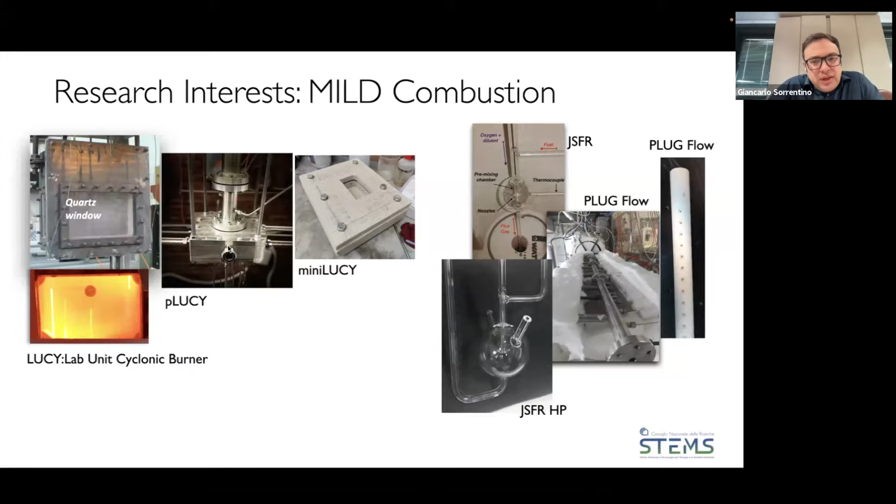So when related to the talk of today, part of our group's research interest is related to mild combustion, and from an experimental point of view we have different facilities, in particular related to the study of kinetics of this combustion regime and the interaction with turbulence and heat transfer in lab scale reactors.

We're working by following this scale bridging approach, which I will also underline later, where we can start from very simple zero-dimensional characteristics of the combustion towards semi-industrial and industrial application of this regime. Of course, we also perform CFD simulation to design apparatus and validate experimental results, along with chemical diagnostics, modeling, and optimization for the kinetic schemes.

Our team, which we call the Pyrolysis and Mild Combustion Lab, is mainly composed of 7 plus me, 8 researchers at different levels. As I said before, we are mainly focused on sustainable combustion processes and pyrolysis processes, mainly for biomass. There are also some PhDs and postdocs who work in our lab and are framed in different research projects that are mainly based on the same topics.

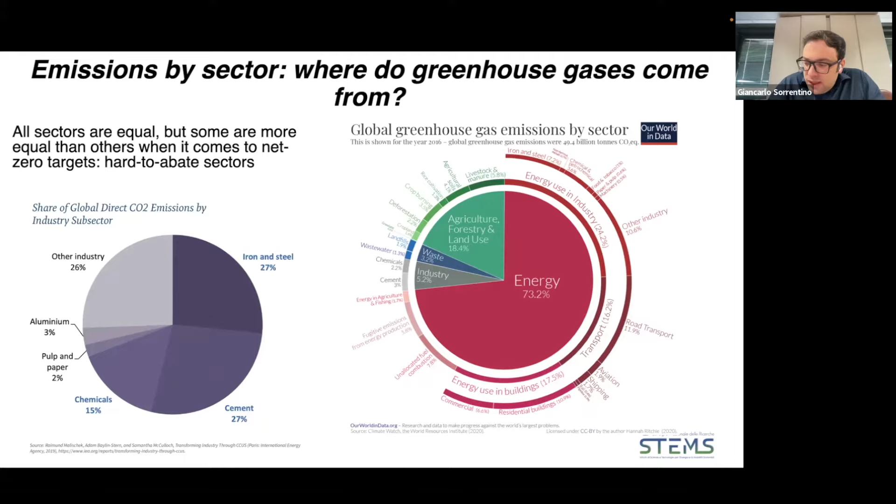As we can see from here, we have different hard-to-abate industries and energy-intensive sectors that are very difficult to decarbonize, and in particular, this is a key point, especially for combustion engineers.

In particular, in this framework, the International Energy Agency identified several scenarios to decrease CO2 emissions, and the main drivers were related to system efficiency, renewables, and fuel switching methodologies that can help reduce greenhouse gas emissions.

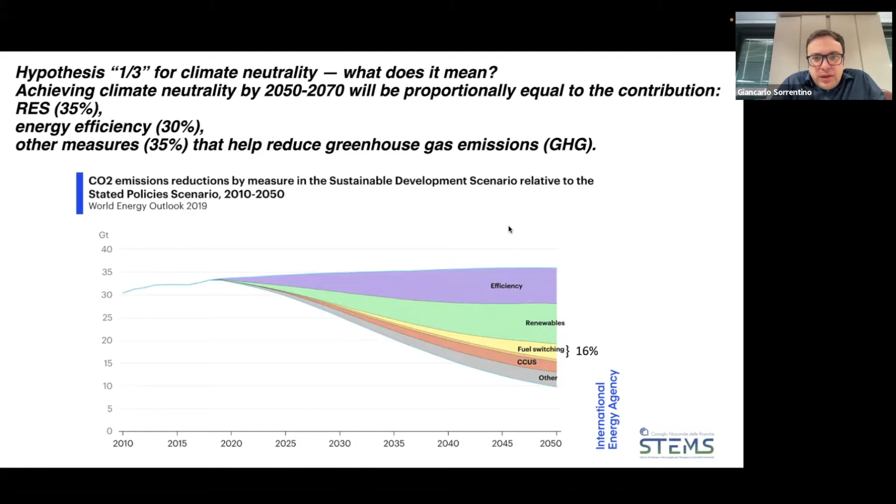So it's very important to frame this scenario related to CO2 emission reduction, and the variability of this future energy mix requires flexible, efficient, and clean combustion technologies. It's very important to address these challenges with combustion technologies that can be framed in this kind of scenario.

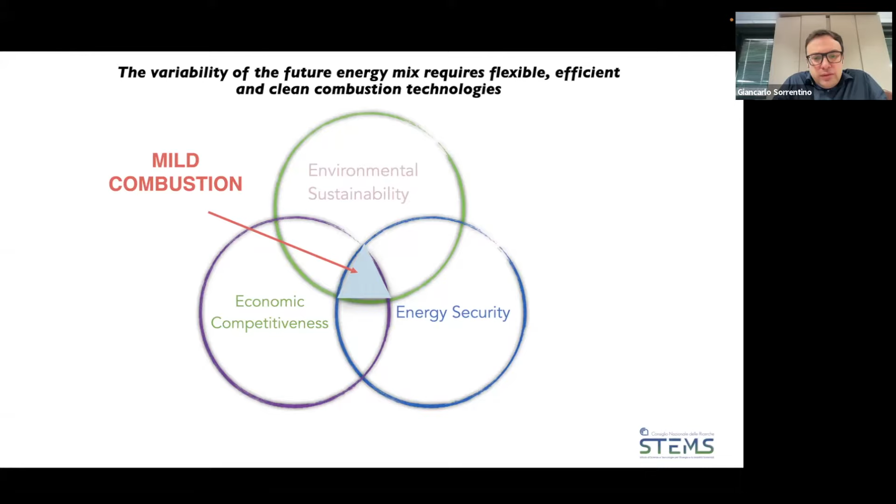One possible solution could be mild combustion, which responds to these challenges. I will talk about timescales later for this combustion regime. But if we look at the system temperature with respect to a conventional combustion regime, it is framed in a lower temperature regime compared to conventional combustion systems.

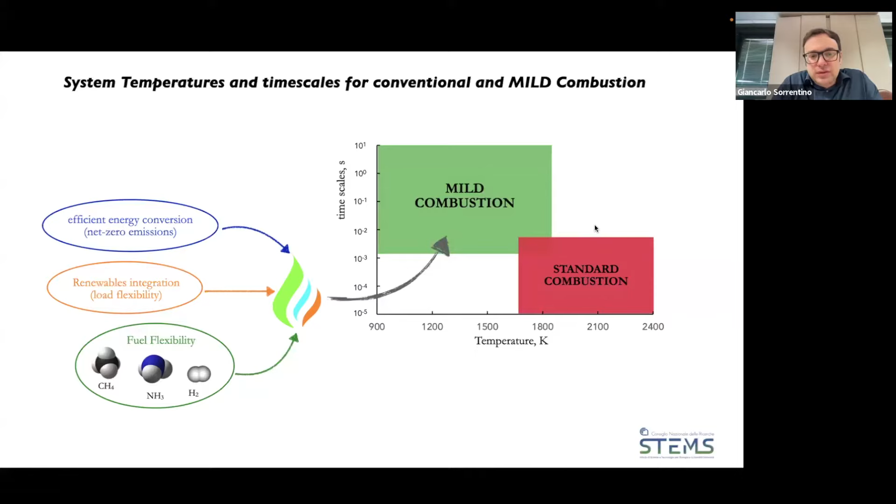If we want to define mild combustion, one of the most accepted definitions in the literature is a combustion process where the maximum allowable temperature increase is lower than the mixture auto-ignition temperature, and the initial temperature of the fresh reactants is higher than the mixture auto-ignition temperature. This is very important to underline, and this kind of condition needs to be obtained.

This can be obtained also at the local scale of the combustor. So it's not necessary to have external preheating and external dilution of the fresh reactants, but if we properly tailor the aerodynamics of the system and design our combustion system properly, we can obtain this condition locally.

Of course, we're passing from something like a flame, where we have a localized heat release on a flame surface, to a system with volumetric heat release across the whole combustion chamber. This can occur since we are operating in very diluted conditions, close to or outside the flammability limits, and in very preheated conditions where mixture auto-ignition is happening.

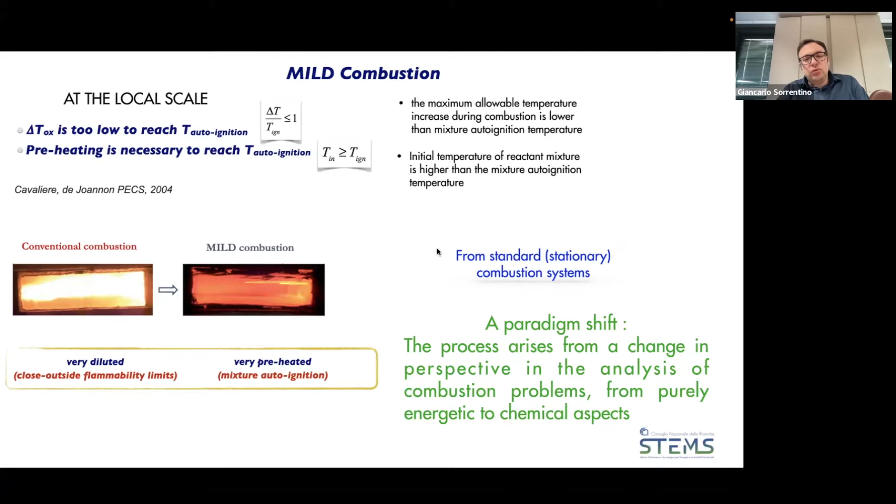So we have a sort of paradigm shift where we pass from a flame-stabilized process to a change in perspective in the analysis of a combustion problem, from a purely energetic approach to something that is very close to a chemical reactor.

If we look at the definition of mild combustion in this kind of diagram, where we report the initial temperature with respect to the oxygen content, we can identify four main areas. In particular, if the preheating of the fresh reactants is too low, we are below the ignition temperature, and the dilution of the system is too high.

So we are at very low oxygen concentration, and the temperature increase is low. We cannot stabilize the combustion process.

On the other hand, if we are inside the flammability limits, the oxygen concentration is higher, and the reactants are not diluted, we have a standard combustion process, the kind studied in combustion textbooks. This is a combustion process mainly stabilized through a feedback of heat released by the flame toward the fresh reactants.

So locally, we have this kind of feedback mechanism from the flame toward the preheated reactants. If we think of the classical thermal theory for a premixed flame, we have reactants preheated up to the ignition temperature, and this is a local process obtained on the micro scale.

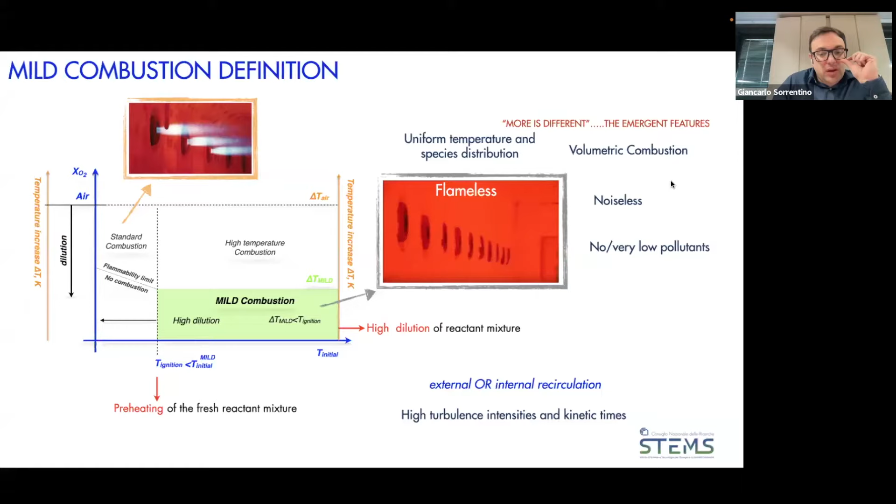So we have different, very peculiar characteristics used for several applications, such as uniform temperature and species distribution inside the reactor, and volumetric combustion - a volumetric distribution of heat flux, of scalars, and of heat release. We have a noiseless process close to net zero pollutant emissions. This can be realized, as I said before, through external or internal recirculation, with a strong effect of turbulent intensity and kinetic time scales.

How can we realize this kind of solution from a technological point of view? If we base this on inlet condition, we can realize this through external dilution and preheating, but this is not a necessary condition. We can realize this kind of condition also at local scale.

This can be obtained in several ways by tailoring the boundary conditions of our process. We can act on the aerodynamics, on the material properties, on the geometry, on the heat exchange through the surroundings. We will see some examples in the following slides.

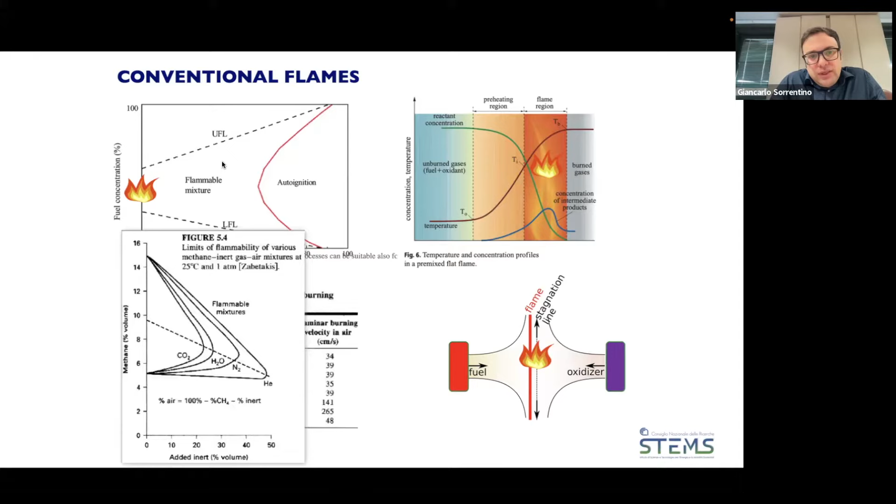As I said before, if we think of a conventional flame, so the standard Mallard-Le Chatelier theory, for a premix flame in a propagating structure, we usually have that outside the flammability limits, if we dilute the fresh reactants with combustion products, we are not able to stabilize a flame. This is not true if the process relies on autoignition, since it can also be stabilized for non-flammable mixtures.

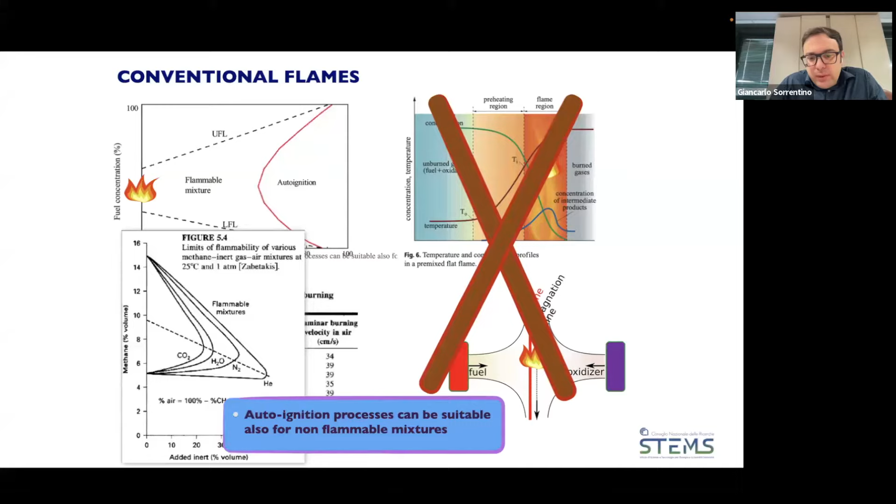From an industrial point of view, this kind of process is stabilized by means of burnt gas recirculation. Usually we have this KV parameter, the recirculation ratio, which is a ratio between the exhaust mass flow rate and the inlet mass flow rate. This is used as a parameter for industrial application to monitor and to have an idea of the occurrence of flameless combustion.

Some more basic studies based on DNS also pointed out how this flame structure is changed, with homogeneous heat released on the whole reactor when we pass from a flame type to a flameless or mild combustion zone. In this case, we usually have the Damkohler number lowered, mainly due to a dramatic change in the kinetic time scale.

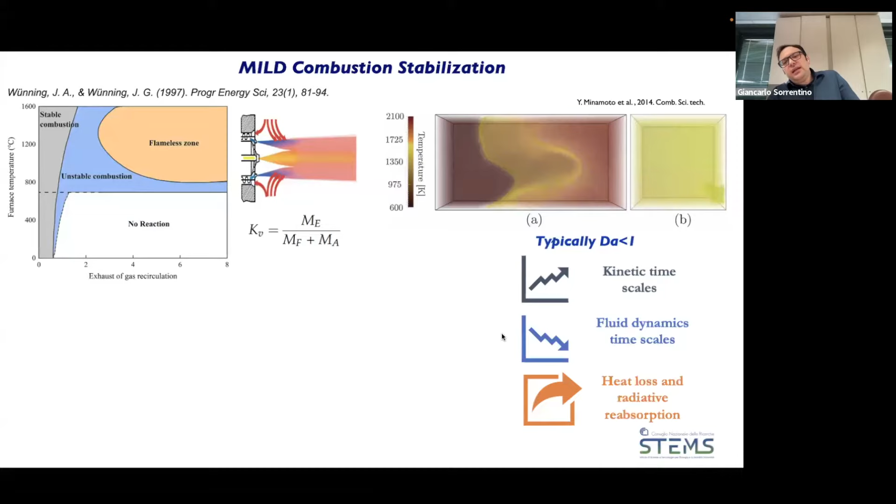We also have some effect on the fluid dynamic time scale and on heat loss and radiative reabsorption. So the stabilization procedures make the numerical modeling very challenging, in particular in terms of kinetics, turbulent chemistry interaction, and heat transfer. Today I would like to point out the main challenges related especially to the interaction between the turbulent time scale and chemistry.

And how can we study how the reactive structure is different with respect to the flame type. For sure we need detailed chemistry to model this kind of process, and later I will show you some examples. So if we move into chemical kinetics, I've reported some studies, some previous studies from our group.

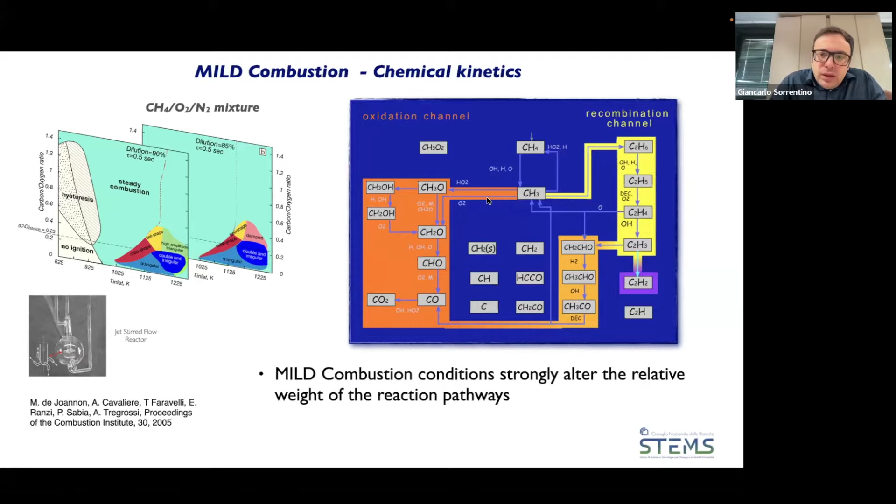In particular, where we have highly diluted and preheated reactants, we can alter strongly the relative weight of the main oxidation and recombination pathways when mild combustion occurs. To give further information on this aspect, under diluted and highly preheated conditions, the structure of the reactive region is significantly changed.

In particular, we have a very modest temperature increase, due mainly to the high dilution level. And we have this shift to lower kinetic regimes with respect to traditional systems, operating in continuously autoignition conditions. So under diluted and highly preheated conditions, the characteristic kinetic time scales change with respect to those involved in traditional systems.

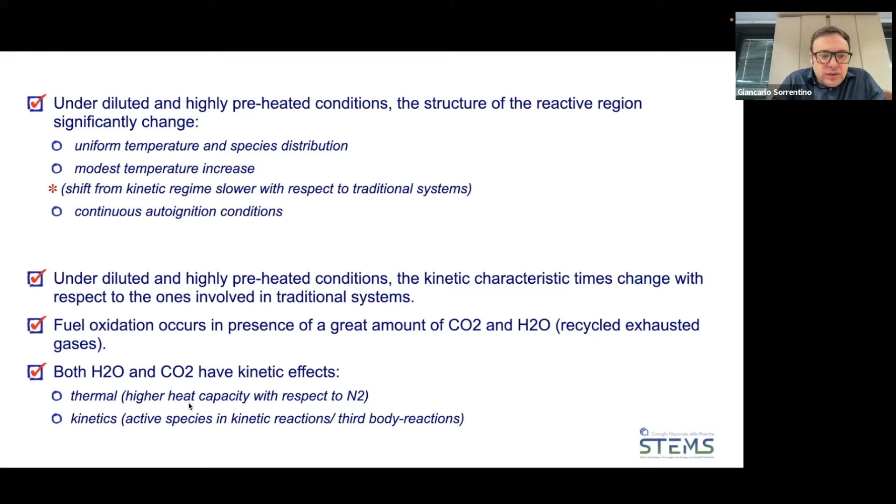If we consider that we usually obtain this process with a great amount of CO2 and water that are recirculated, we have strong kinetic effects of water and CO2, both thermally and kinetically, on the process.

If we look at the structure of the reactive region, for a conventional flame we have this deflagrative or diffusive interface that is mainly obtained through the heat that comes from the flame. So the structure of the flame is mainly related to the heat released by the flame.

On the other hand, if we look in the literature at the structure of a mild reactive region, we have a structure mainly related to autoignition kernels that are transported by convection mechanisms and grow in time and space. They give the appearance of a uniform process, mainly at the macro scales, but we will see that we can have different behaviors at the micro scales with respect to the macro one.

There is a pioneering work by Plessing and Peters where they show this kind of transition in a burner for a furnace, passing from a premix methane flame to flameless oxidation.

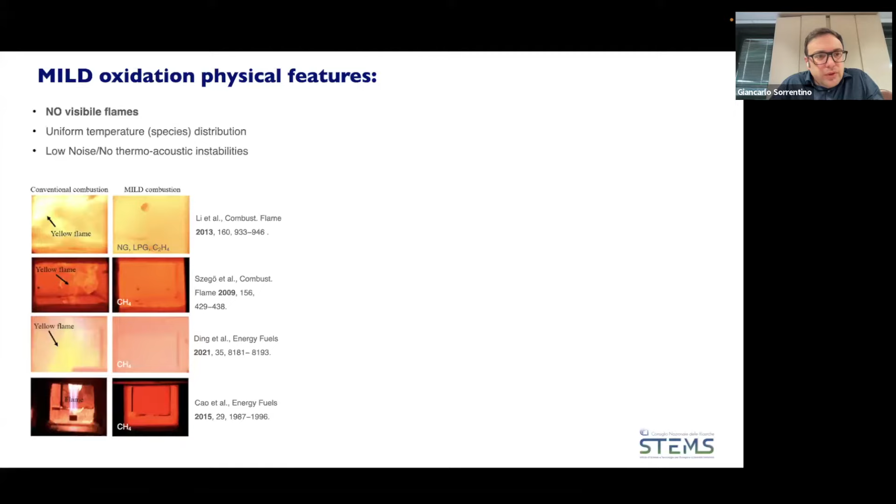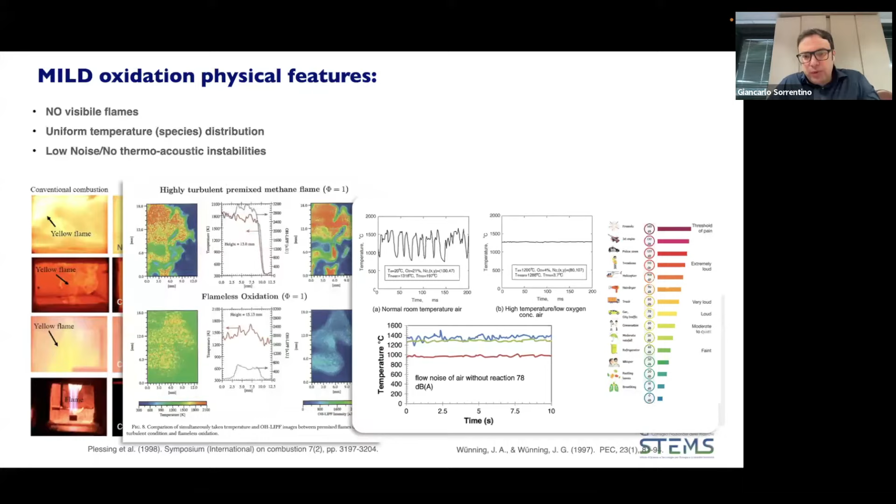So the main physical feature from an application and technological point of view: we have the absence of visible flame, uniformity of temperature and species distribution, and low noise, which is especially important for thermoacoustic applications.

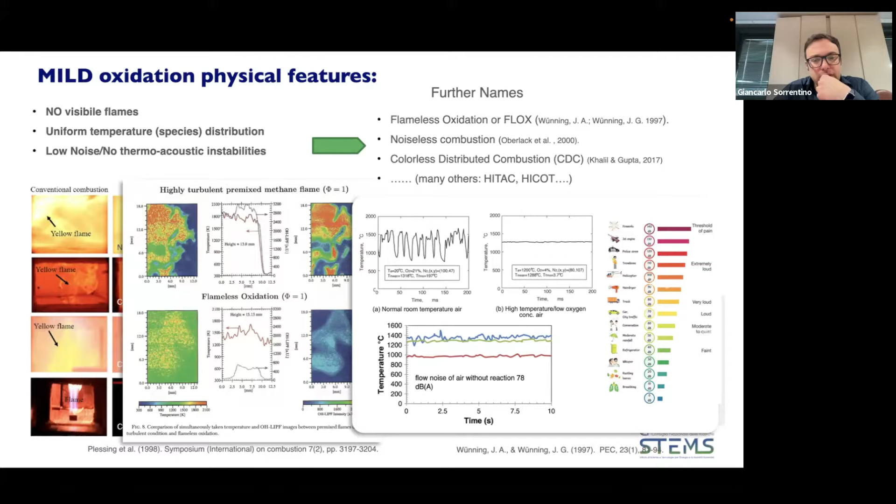And in fact, this kind of regime is also related to other names in the literature for this combustion process, such as flameless, noiseless, or colorless combustion. Mainly these names are related not to the specific condition realized inside the combustion chamber, but mainly to the outlet features of the combustion process. So it's mainly related to the specific application of this regime.

So these features are very important for a variety of applications, especially the uniformity of temperature for hard-to-abate industries, and also the high radiative heat transfer. But also the fact that we are operating with continuous auto-ignition processes permits us to oxidize and stabilize the combustion process also with, for example, low-grade fuels with very low heating value. So we have a large fuel flexibility of the combustion process, especially when compared with a conventional one.

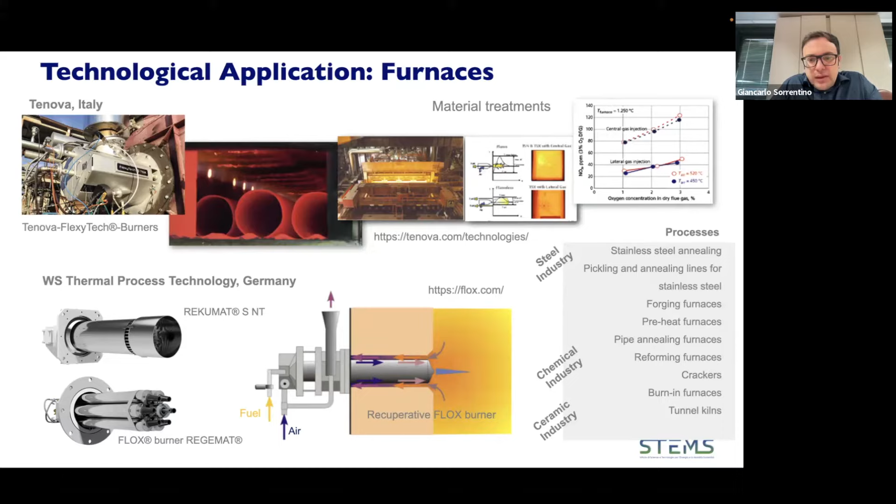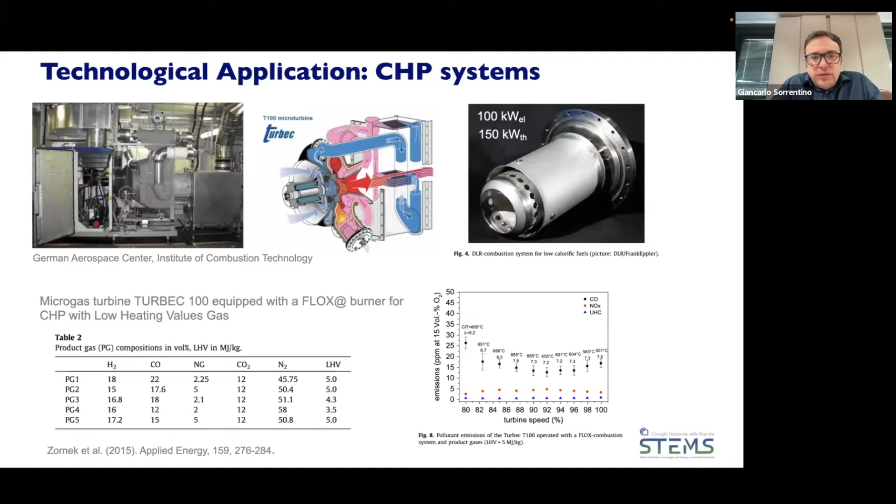Just some notes on the application. This kind of technology is used in furnaces, especially in the steel industry, but also in ceramic and chemical industries, and some other applications, though these are specific to low TRL levels. There are also some commercialized systems but they are very few. They're used also for microgas turbines for combined heat and power, and also there are a lot of applications for boilers, for example.

So on the basis of what we have said up to now, it's important to underline that despite the application of such concepts to heavy industries, the development of mild combustion in other fields, especially through a CFD-guided design, is hindered by previous issues. Specifically, the decrease of kinetic rates leads to low Damkohler number, which usually in literature are reported as close to unity.

So it's of paramount importance to introduce detailed chemistry for the optimization of the design in this kind of combustor, and thus chemistry plays a crucial role due to the relevance of finite rate. In particular, when we are moving from high to low temperature regime, the chemical activity tends to decrease, as the main effect related to the reactant dilution. So the chemical time scales are slower with respect to standard combustion cases.

We can see this from this very simple diagram. So if we are in a high temperature combustion regime, turbulence-chemistry interactions are limited since their overlapping on time scales between mixing, turbulence, and chemistry is very limited. So usually what combustion engineers do is use very simple chemistry modeling, such as reduced chemistry or simplified chemistry, also 4 or 5 step reactions to model this kind of combustor, or for example by relying on the simple flamelet, steady flamelet approach, and results are usually very good. This is the main reason for the limited overlap between the flow and the chemistry time scale.

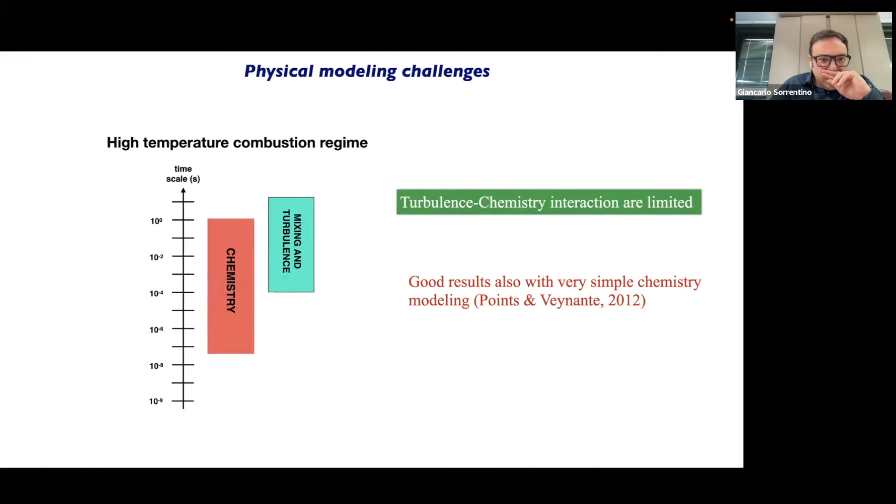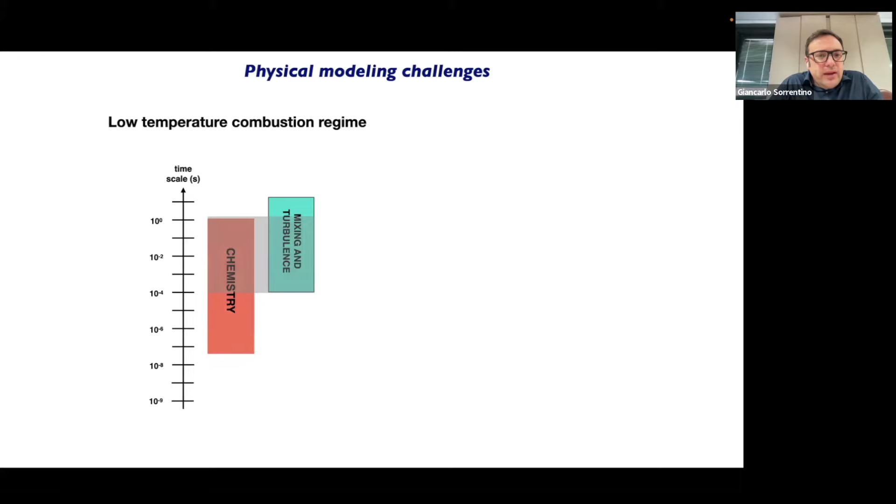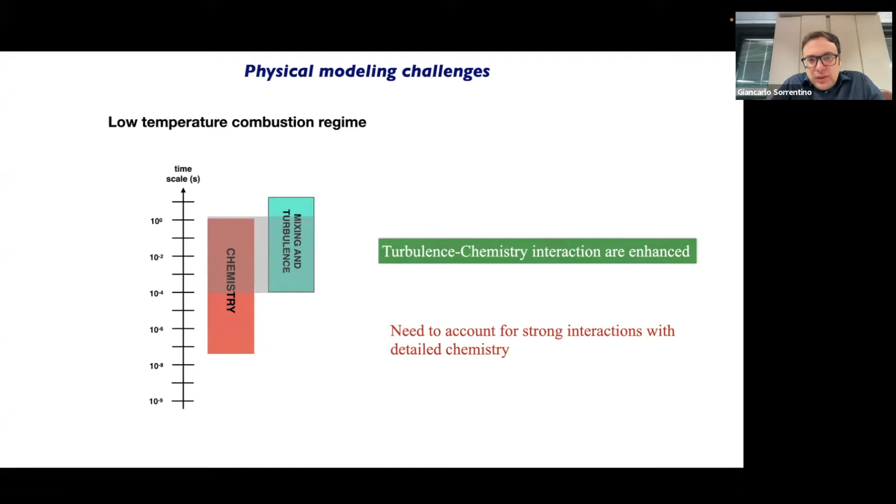So if we go to the low temperature combustion regime, as we said before, chemical time scales are longer, and so we have a strong overlap between time scales. So we have an enhanced interaction between turbulence and chemistry, and it's very important to account for such interaction with detailed chemistry modeling.

So usually researchers do that in different kinds of lab scale apparatus. There are several literature papers, especially on jet flames, where this kind of phenomena are represented, but they are not taken into account in a comprehensive way, since for example in jet in hot coflow flames we are not dealing with wall effects or the effect of recirculation and heat transfer on the combustion process.

This can be done, so this kind of modeling and the previous issues can also be addressed in different kinds of lab scale apparatus that were built in the past for studying this kind of process. We have mainly two kinds of classification based on the aerodynamics: we can have reverse flow and also swirled or cyclonic flow combustors.

This kind of confined environment permits us to study also the effect of vitiation and wall heat transfer on ignition and on the oxidation process, taking into account also the effect of turbulence. This is a complication of the problem, since jet flame configuration only deals with the effect of transport and turbulence and their interaction with chemistry, without taking into account other kinds of effects.

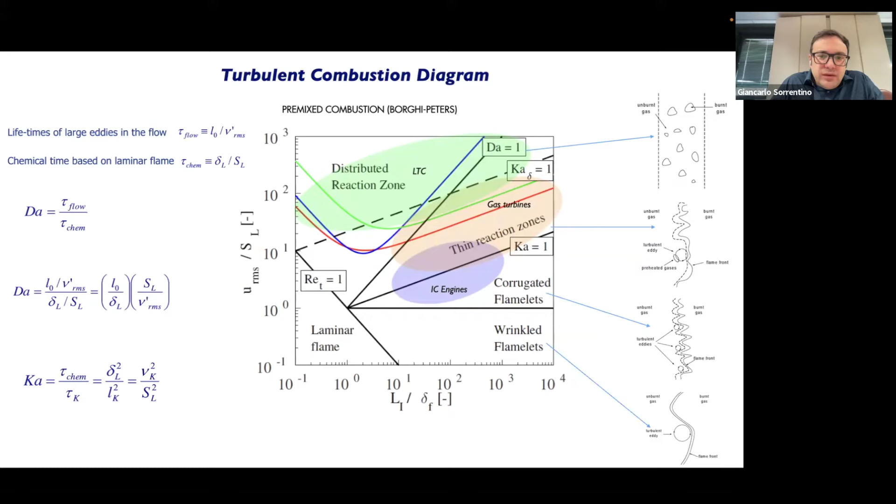So if we start from what we know from turbulent combustion, and think of the Borghi diagram for premixed combustion, we can see what happens on this kind of representation when we dilute fresh reactants. Of course we are changing the reaction thickness, and in a certain way also the laminar burning velocity.

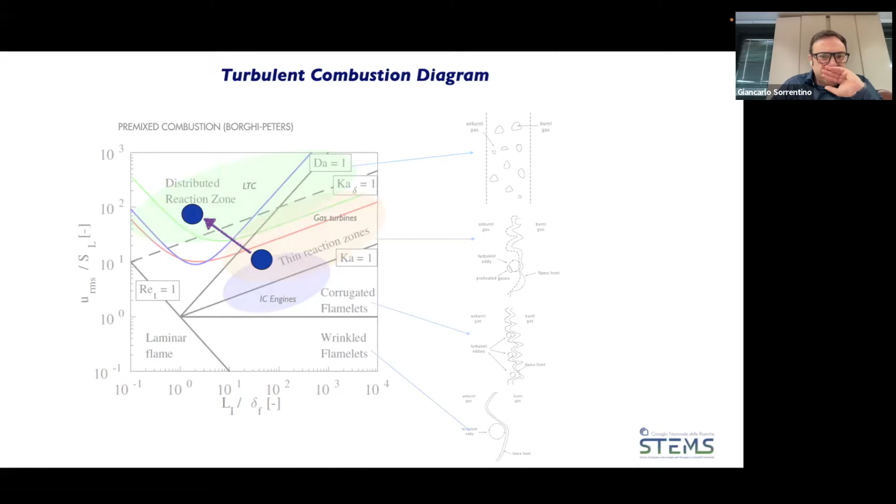So we are passing, for example, if we operate in the thin reaction zone with moderate Karlovitz and Damkohler number, if we are moving towards diluted conditions, we are moving in this direction, toward what people call the distributed reaction zone. But this is mainly defined for premixed combustion.

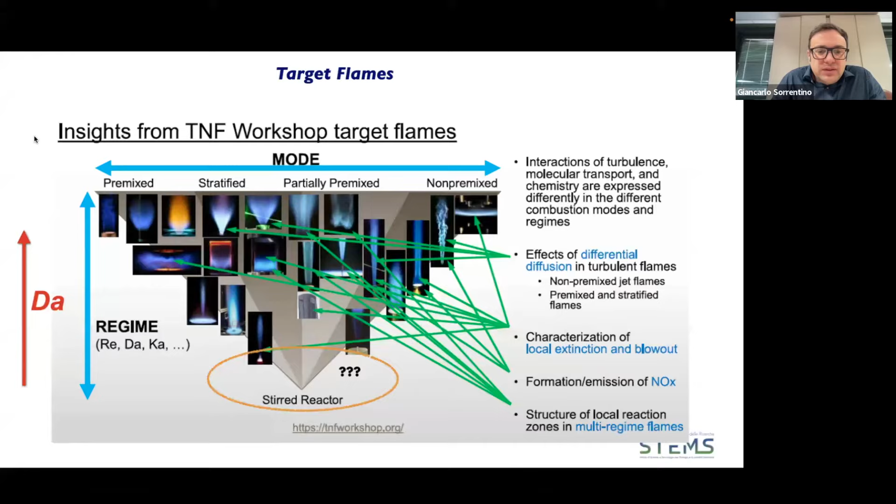But this kind of regime is mainly unexplored in the combustion community. If we see some insights from the TNF workshop target flames, there is a lot of work on high Damkohler number flames. But when we reduce this dimensionless number and increase the Karlovitz number toward the stirred reactor regime, we have very few experiments and very little information.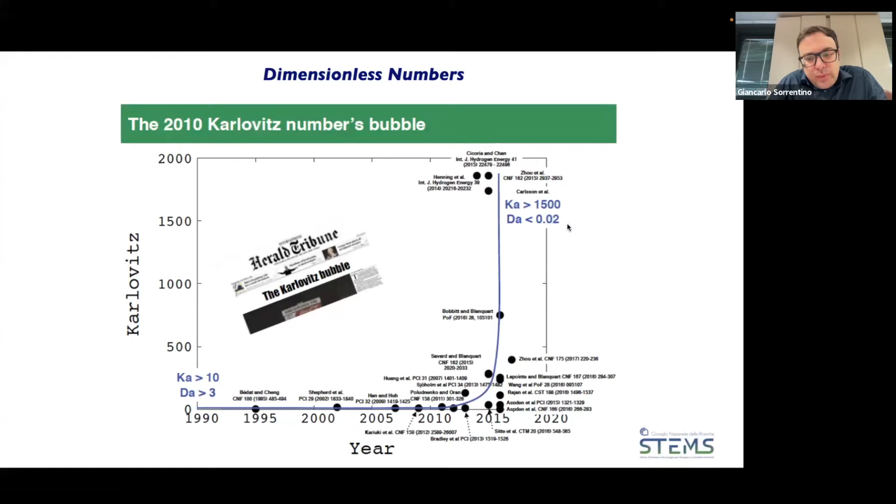So on this basis, if we try to see how experiments over the years have changed this dimensionless number, we can see that after 2010, we had an explosion of Karlovitz number studies toward the very high Karlovitz number, especially for premixed flames. This is the same for the Damkohler number. So we had a rush toward the Damkohler number, where several experiments moved toward this regime.

So we can say that on the basis of applications moving toward low temperature combustion processes and diluted regimes, there are a lot of experiments in the literature investigating such conditions. But the question is: how can this kind of reactive regime exist?

If we think of what we've said before, and refer to some literature studies, we have that mainly the increase of flame robustness is due to dilution of burnt gas. So we have a reactive region that we can only stabilize if we have significant local preheating and vitiation of fresh gases. So this is what I said before - we don't have a propagation.

Mainly, we have some auto-igniting kernels that are formed and that convect downstream and grow. So we usually have this kind of distributed ignition reaction zone that is very difficult to monitor since it's very faint and has a patchy appearance, and is distributed on the whole volume.

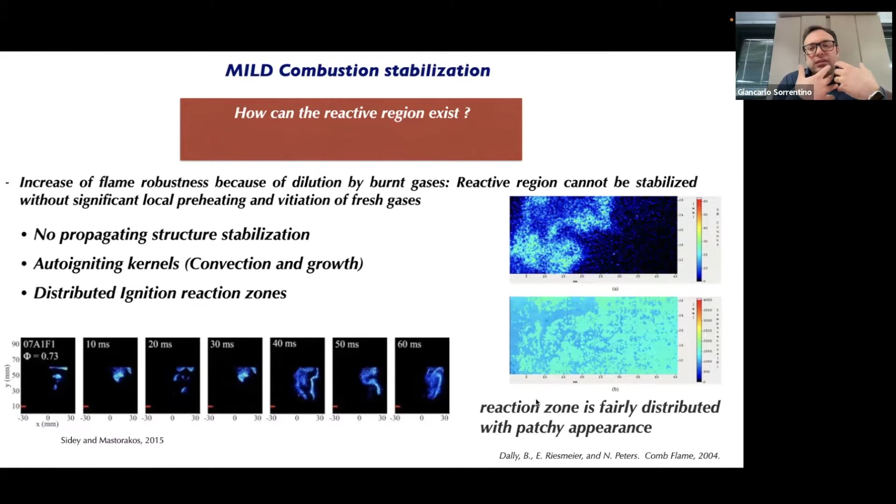So if we come back to the Borghi diagram, the question is, can we distinguish - can we think of a corresponding Borghi diagram for the scenario I've presented up to now? I think that we don't have the possibility to correlate the two things. The Borghi diagram was conceived for a combustion process mainly related to a propagating structure with a feedback mechanism. So since we are not in the same condition, we have a paradigm shift.

I think that we cannot rely on that. And in particular, we have other different behaviors that are related to this kind of combustion process.

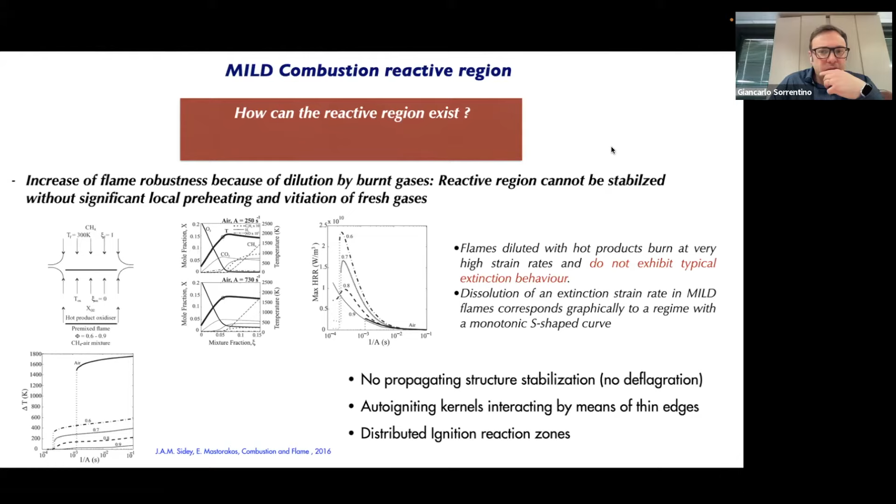In particular, if we think of the classical S-shaped structure of the curve for flames in counterflow diffusion conditions, we have that under mild combustion, we have dissolution of the extinction strain rate. So we have this monotonic behavior in this kind of condition. This is a signature of the fact that we have a reactive structure that is profoundly different with respect to the previous one.

This is also reported in the literature as globally distributed reaction zones when we are moving toward very low oxygen contents. If we look at some DNS studies from Minamoto and Swaminathan at Cambridge University, we see that locally there can be broadened flamelets, but also distributed reaction. So these kinds of behaviors are occurring simultaneously in the reaction field.

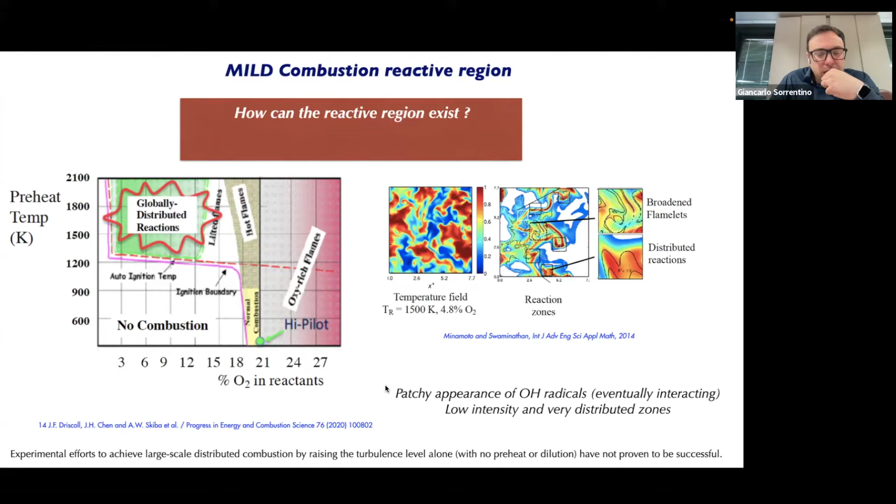The typical questions of this kind of structure are mainly related to the inception of mild combustion, to the fact that flame or autoignition is predominant, and if in some part of the reactive regime we have autoignition and flame propagation occurring simultaneously. So the morphological and topological features of the reaction zones are very important, and there is a key question in the mild combustion community: are these structures distributed across all spatial scales of a combustor, or can they change as a function of the scale considered?

Of course, the choice of a correct modeling paradigm for this kind of combustion regime is very important, and also the kind of experimental diagnostics that we have to use. So these questions are very important in the mild combustion community, and most of them are still unsolved.

So in order to understand what happens when moving toward mild combustion, we can start by studying, since mild combustion relies on spontaneous ignition processes, what we usually study in the combustion textbooks - the spontaneous ignition equations, especially considering the ones related to enthalpy and chemical species.

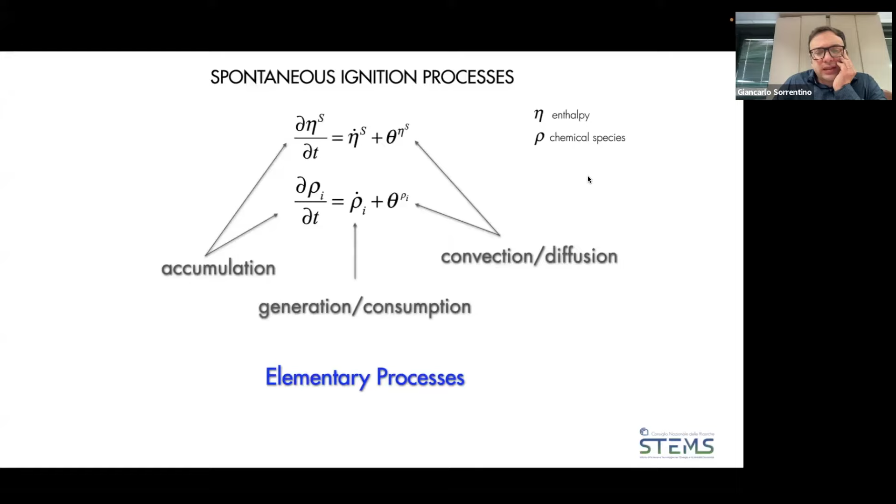So we have the accumulation term, the generation-consumption term, and the one related to convective and diffusion transport. As a function of the dimensionality of the problem, different elementary processes can occur - I can pass from simple autoignition processes to diffusion ignition ones, for example if I also consider a diffusion term.

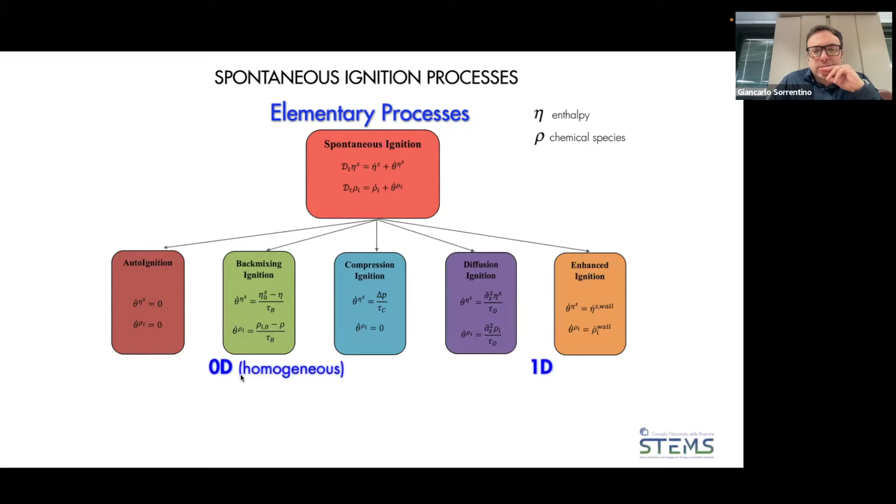I don't want to treat all these processes, but it's very important to underline that under 0D or one-dimensional conditions, a lot of literature studies were reported for all of these.

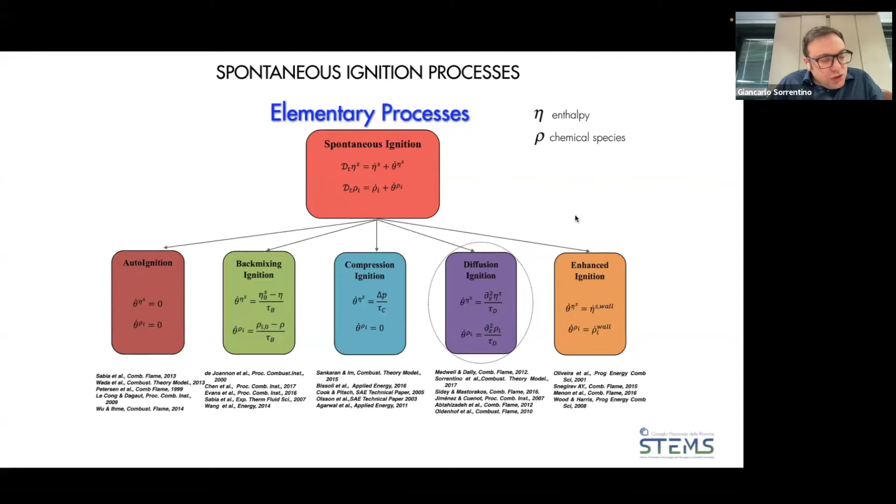During this webinar, I want to underline some literature works done on diffusion ignition processes. If we think about the elementary processes that can occur with premixed or non-premixed reactants, we can obtain peculiar characteristics of the reactive region if we dilute and preheat the reactants, starting from a premixed or non-premixed configuration.

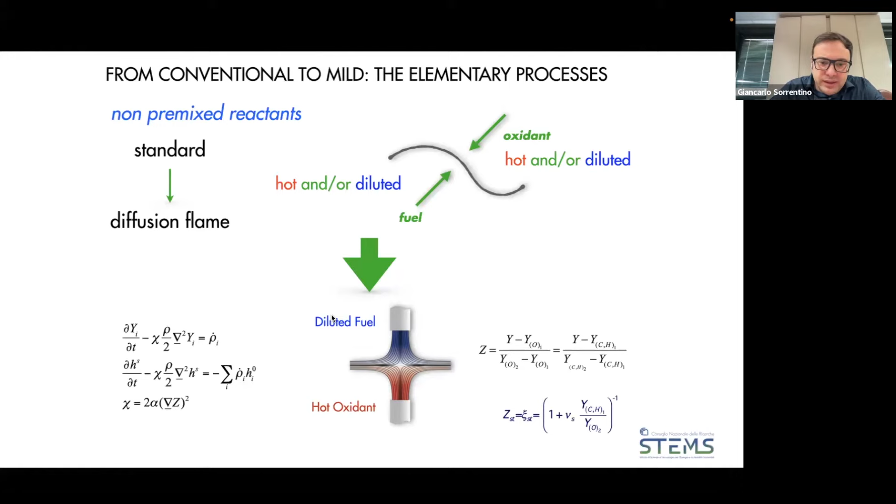And if we study this kind of process in a counterflow diffusion flame, by diluting the fuel, for example, and by preheating the oxidizer, we have this kind of behavior.

If we start from an undiluted condition of the fuel, so just methane without nitrogen, and preheated air, the temperature profile is the following. We have the heat release profile with an oxidation region and a pyrolytic one, and the stoichiometric point is usually located close to the maximum temperature of the system.

If we dilute, we have this kind of behavior - the heat release is shifted toward higher mixture fraction, and it is also widened, if we calculate the standard deviation of this profile by approximating it with a Gaussian profile.

This is an approach used by Peters. And when we calculate the standard deviation of this profile, we find it increases by increasing the fuel dilution level.

But when we increase the dilution, this standard deviation increases up to a critical point, a turning point we can say, where the pyrolytic region disappears. In this case, we can have the occurrence of this flameless behavior where we don't have a pyrolytic region.

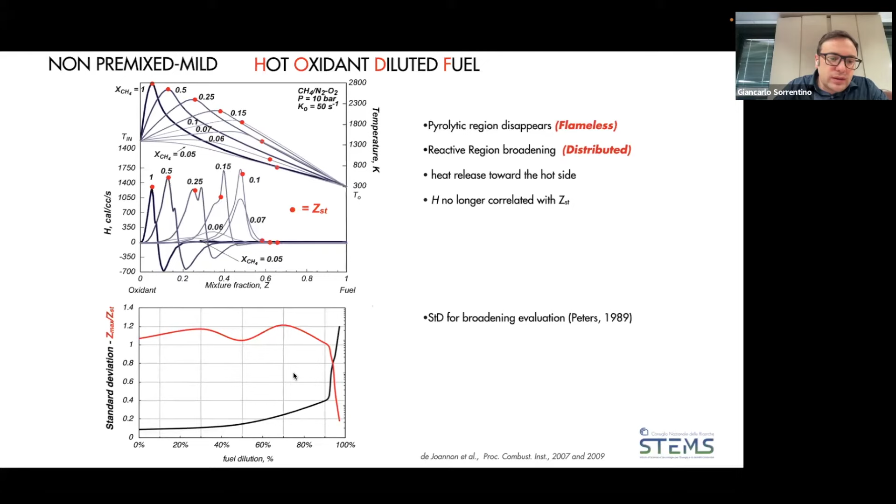We have this behavior that can be pointed out by this red curve, where the ratio between the maximum mixture fraction and the stoichiometric one changes with the fuel dilution. And if we compute the Damköhler number, we find that around 90% dilution, there is a steep decrease in the Damköhler number to a value close to 1.

So all these characteristics point to the need for a new definition, a new process that in the literature we call diluted diffusion ignition, to underline that the elementary structures stabilized are very different with respect to a flame-type diffusion flame. It's mainly a process related to diffusion ignition, diffusion ignition due to hot and diluted reactants.

So if we study this process also in an unsteady, or in a steady condition, we have similar results. In particular, the ignition starts around the most reactive mixture fraction, and it is completed at the stoichiometric point. So we have a diffusive structure growth with longer ignition stabilization times with respect to a conventional flame.

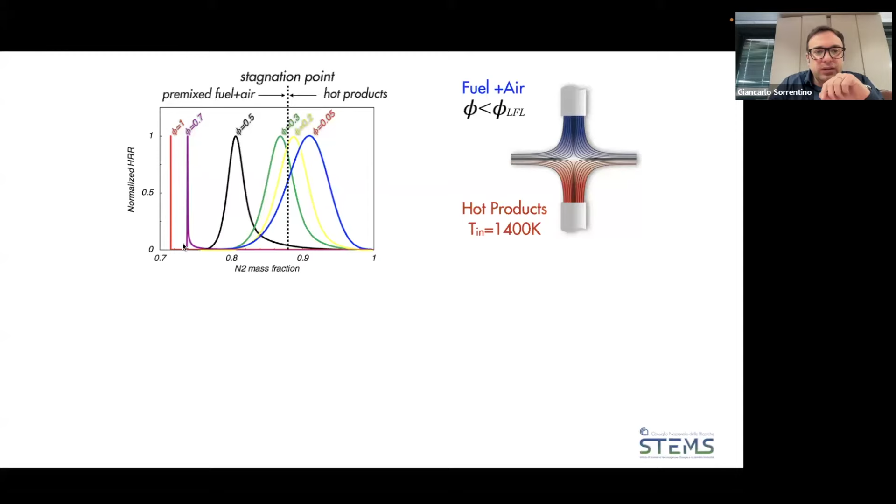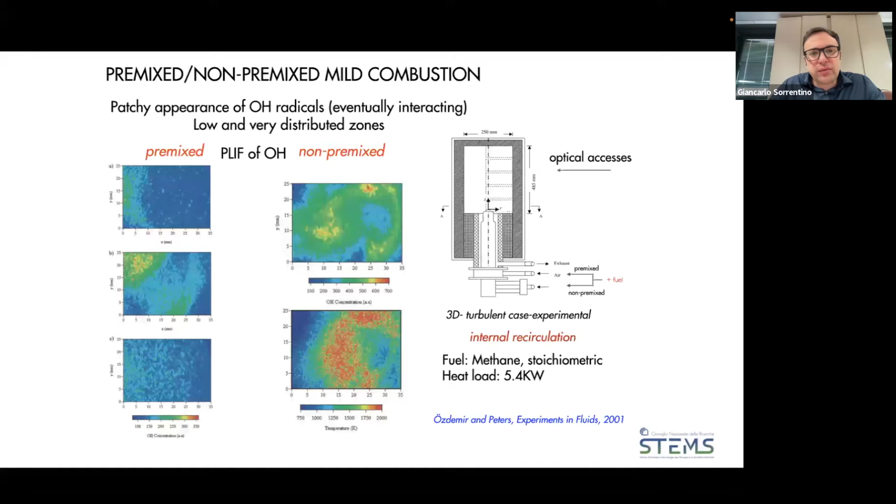This kind of structure was also recognized in the literature, and we can also obtain it if we deal with premixed conditions of fuel and air. So if we use fuel and air versus hot products, and we are outside the flammability limits, we have this change in the heat release profile from a localized heat release to a more broadened and distributed one, and we obtain similar findings to before. This kind of behavior was also recognized in different experimental apparatus.

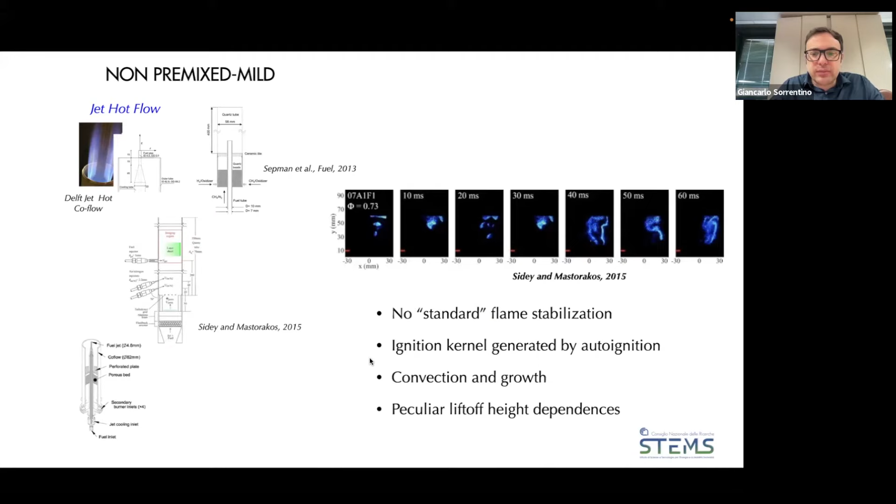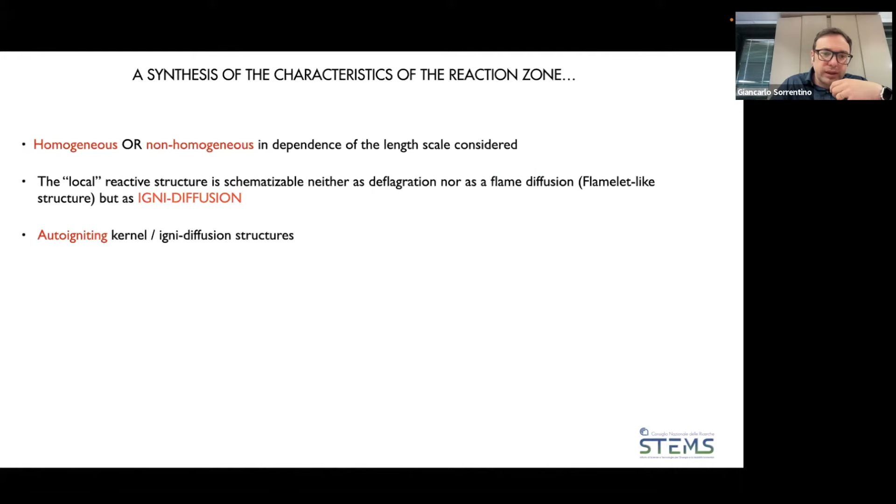I don't want to stress more on this, but it's very important that this kind of structure was also recognized in several experimental and DNS studies by different groups. So we have a process that is homogeneous or not as a function of the length scale we are considering, and the local structure can be schematized not as a deflagration or diffusion flame, but as an ignition diffusion process, with autoignition kernels and ignition diffusion structures that are formed and grow in time and space.

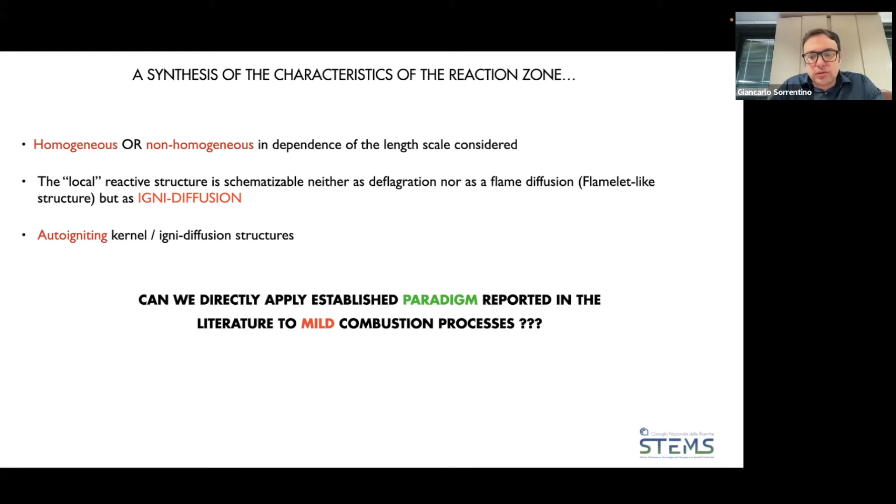So a simple question is: if we want to model this kind of process, can we directly apply the paradigm that we usually use in the literature for turbulent combustion to mild combustion? Also in this case, the answer, in my opinion, is no, since we have an ignition process that is very different.

And usually in the literature, people have considered two kinds of options. The first one is the more simple one: to properly tune or modify the modeling paradigms for distributed combustion conditions. Some groups also tried to find if there is a representative canonical reactor for such conditions, in order to identify a new combustion paradigm, a new modeling paradigm.

So if we look at turbulent combustion models usually used for CFD, as a function of flow and chemistry complexity, we can say that in the literature the two most used modeling paradigms are mainly: one based on tabulated chemistry, such as FGM or similar approaches, and the other based on reactor-based approaches, such as the eddy dissipation concept, or newer approaches such as the partially stirred reactor. Other approaches are sometimes used, but they're mainly related to specific applications.

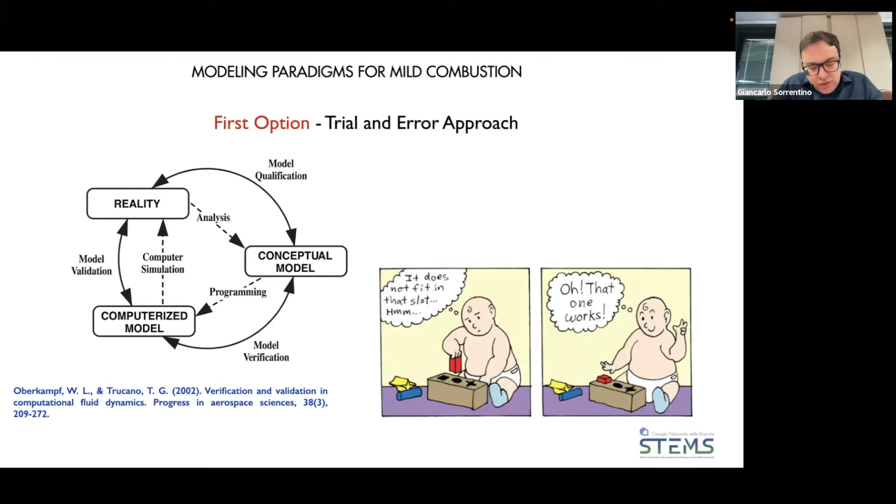So the first option is to use a trial and error approach, where I tune the model with respect to experimental results. This was done in several studies, especially for the jet-in-hot-coflow flame in Adelaide. In particular, they used the flamelet approach, this very simple model, the steady flamelet, to represent the combustion zone. And if you see the results, there was strong disagreement with the experiments using the steady flamelet.

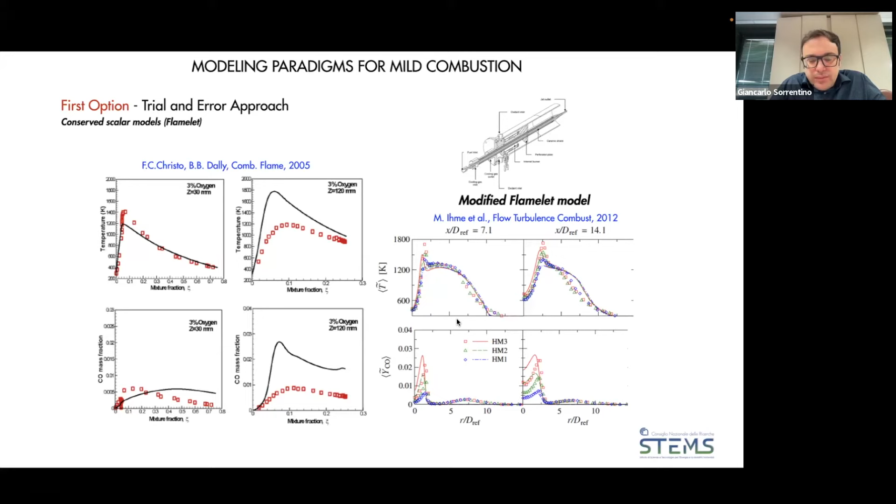The group of Matthias Ihme also tried to modify this kind of approach to tune it with respect to the experimental results, and this approach gave reasonable results. The same was done by several groups, by Parente in the past, and also by the group at Delft University, in particular by modifying the eddy dissipation concept constants. They found good agreement between the modeling and the experiments.

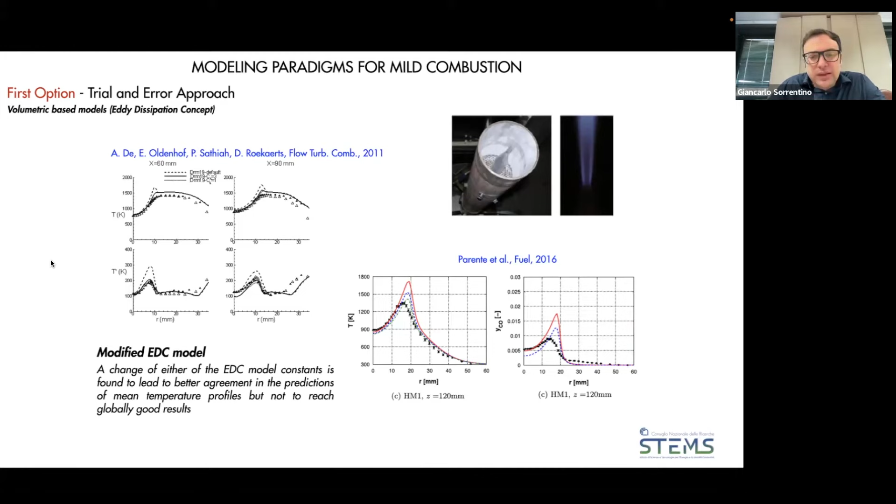Finally, we have also done some modification in our group with respect to the FGM method, and the same has also been done by Roekaerts.

When this kind of tabulation methods were used, by changing the models with respect to the findings obtained by the experiments.

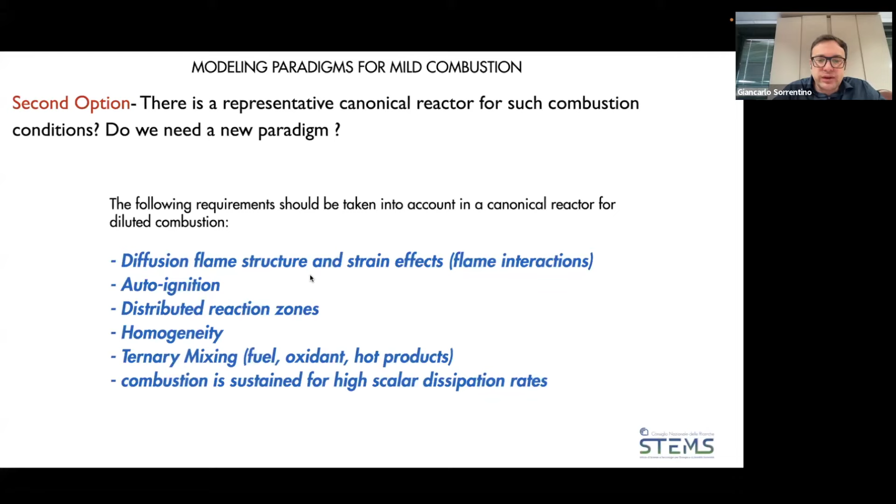This kind of trial and error approach gave some results, but a second option is to understand, on the basis of the findings reported before, there are new paradigms we can use to model this kind of reactor for combustion processes. Of course, a simple question can be: if there is a canonical reactor for these conditions, it has to satisfy a lot of requirements. So we need to take into account flame interaction, autoignition, distributed reaction zone, ternary mixing, and also the combustion needs to be sustained for very high scalar dissipation rate.

So we are moving toward opposite modeling paradigms: the flamelets one, where I have a model based on gradient effects, and the other one, the perfectly stirred reactor, that assumes homogeneous mixing within a local structure.

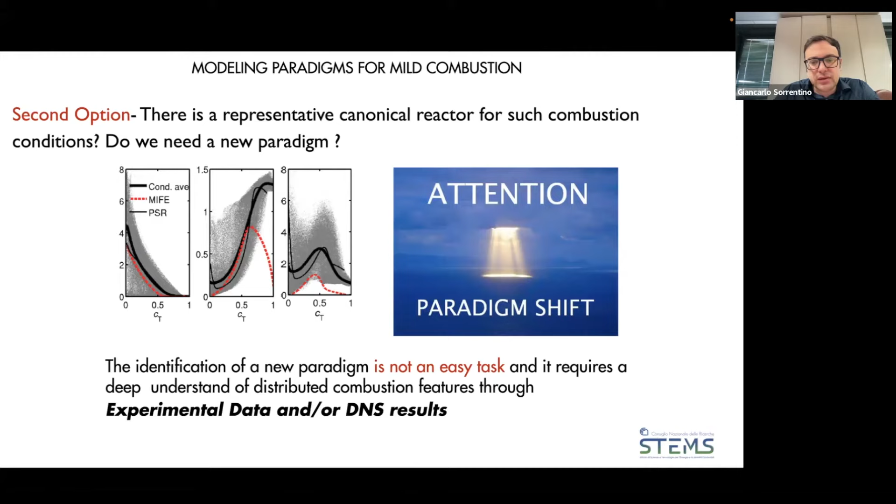From experimental and DNS studies, we had some evidence that it's not an easy task to identify this kind of new paradigm for this distributed reaction region. But there are some examples. For example, the group of ULB, on the basis of DNS, tried to implement a partially stirred reactor model to represent the mild reaction region, and the results were very good.

But there is, in my opinion, also a third option: we can combine the two options mentioned before in order to take into account their different characteristics. This was also done in the literature. For example, there is collaborative work between Cambridge and KAUST where they used tabulated chemistry combined with PSR, and the results were very good.

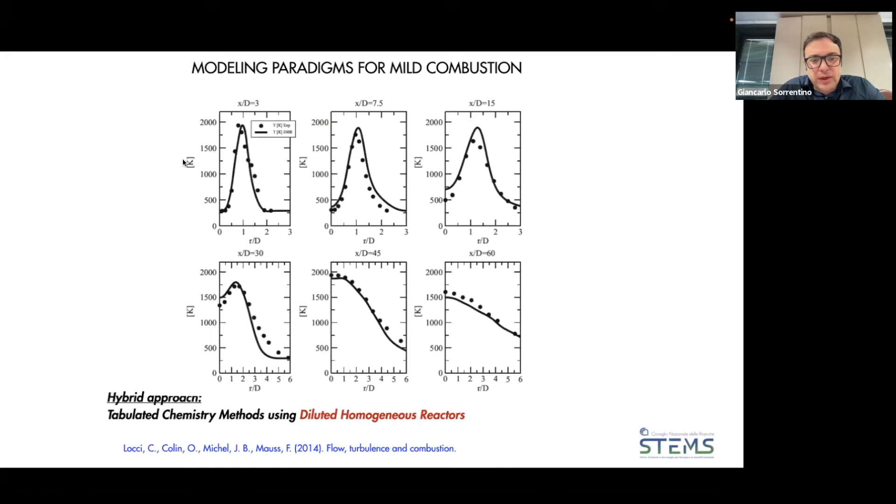The same was done by the group of Fabian Mauss, where tabulated chemistry was used with a diluted homogeneous reactor in a furnace. Other recent approaches used the combination of tabulated chemistry with different scalar mixing models, and results in this case were also very good.

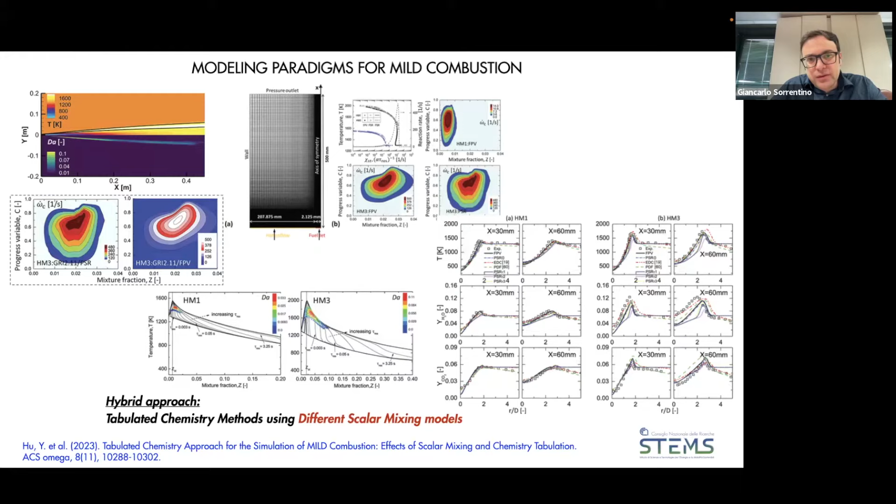So, of course, this kind of model was validated at lab scale on jet flame reactors. Another possible question is whether there's a dependence of this validation approach on the size and scale being considered. Of course, the answer is yes, because size and scale are very important, especially for combustion.

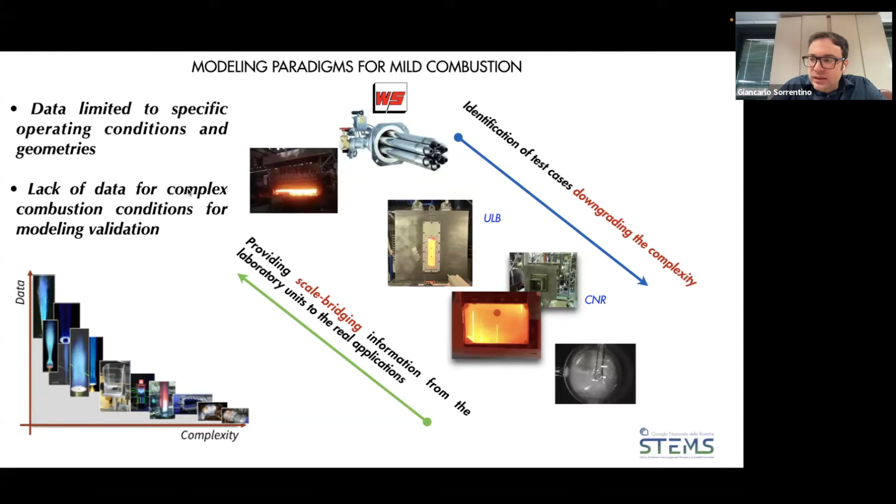Since we are validating these approaches starting from flames where we have a lot of data, I think the next steps in this research should be to validate models and provide new information on what we would call scale bridge reactors, which provide information bridging the lab scale toward real applications, by increasing the complexity of the system in a systematic way. Of course, we will have less precise data, but that can be used to validate processes closer to real applications.

In my view, we have to find a way to validate the model by following this kind of validation hierarchy, moving from systems very close to lab scale, for example for kinetics or for transport and turbulence, and by identifying scale bridge reactors that can couple all these processes, where we increase the complexity but have less data, limited to certain conditions. This is very important because it brings us closer to applications, and we need to do this through both experiments and models that cross-validate each other.

To show some examples of these scale bridge reactors, I report results we obtained in Naples on this laboratory unit cyclonic burner, LUCY, which is mainly a mild burner based on a cyclonic flow with two antisymmetric inlets of fuel and air. We can obtain, for a wide palette of fuels from hydrocarbons to ammonia to alcohols and hydrogen, distributed mild combustion conditions with a stable reactive region and zero pollutants.

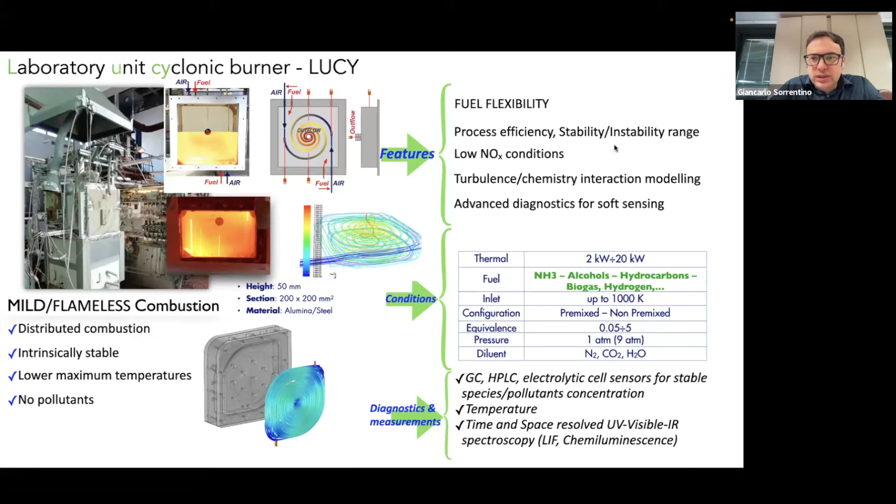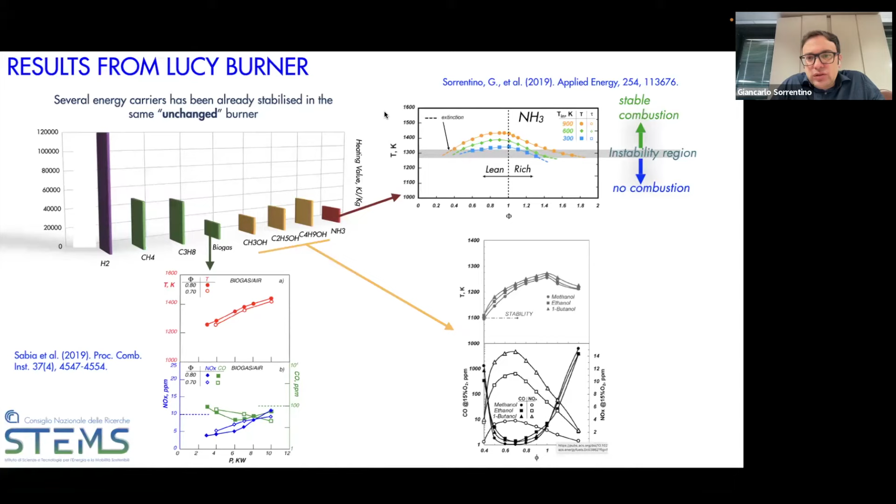In this case, we obtained very good results, as I said, with a wide palette of energy carriers without any modification to the burner. We were also able to burn pure ammonia across a wide range of operating conditions with very low pollutant emissions.

These are just to show you some results. With this kind of reactor, of course, we tried to validate the models I told you about before. We had very encouraging results using tabulated chemistry, such as FGM, modified properly to account for mild combustion conditions, as well as the partially stirred reactor model. Agreement with experimental results was good, and the same was done for ammonia, with encouraging results as well.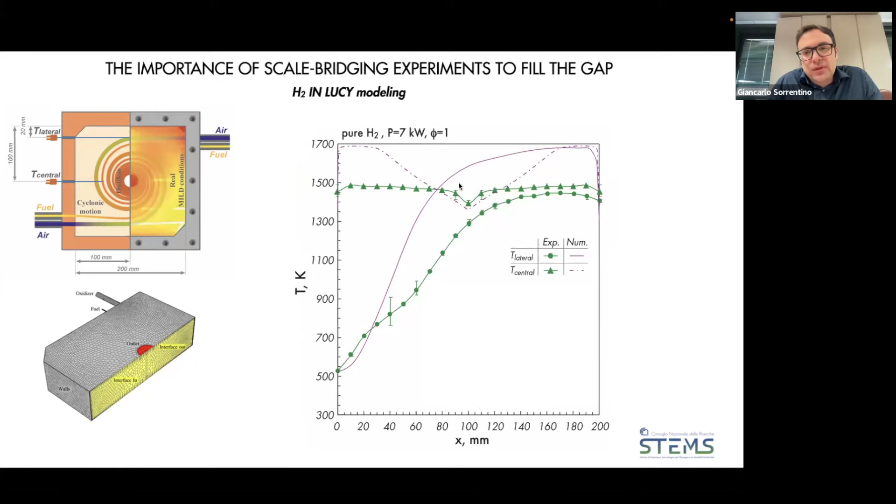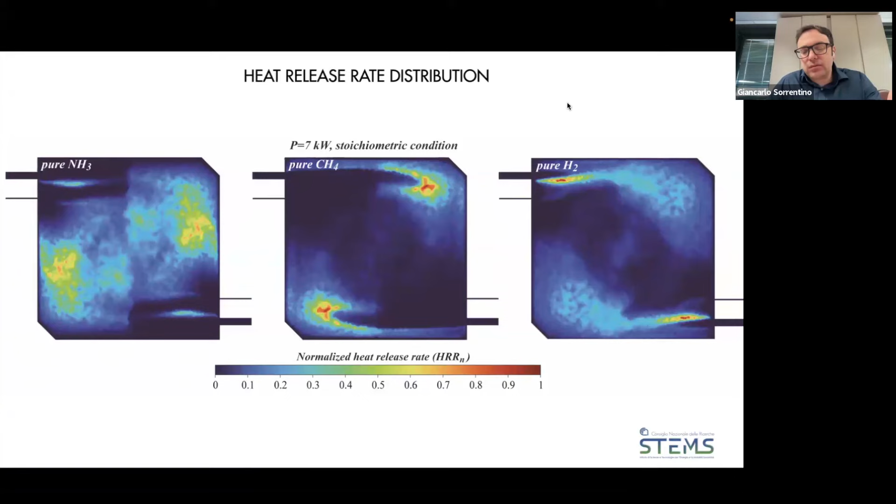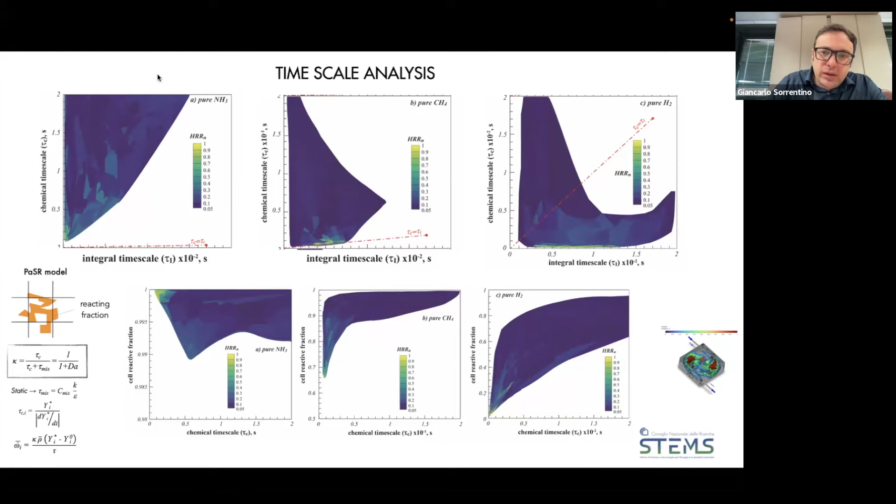When we tried to use the same modeling approach to validate hydrogen experimental data, we found some important disagreements with respect to the numerical results. For example, if we look at the heat release distribution obtained with the partially stirred reactor, when passing from ammonia to hydrogen, we see that we are moving the heat release distribution in the reactors, because when the fuel is changed we have a different distribution of chemical and fluid dynamic time scales. It's important to underline that, based on the fuel, we can have an a priori signature of the occurrence and time scale evolution of mild combustion in our burner by comparing the chemical and mixing time scales.

Coming back to hydrogen, further modeling developments were related to a work in collaboration with ENEA, with large eddy simulation of hydrogen-air mild combustion. We saw that by using a proper large eddy simulation environment, we are able to catch the experimental results with respect to RANS. So for hydrogen, the modeling of the mixing and fluid dynamics is very important, especially for this kind of burner.

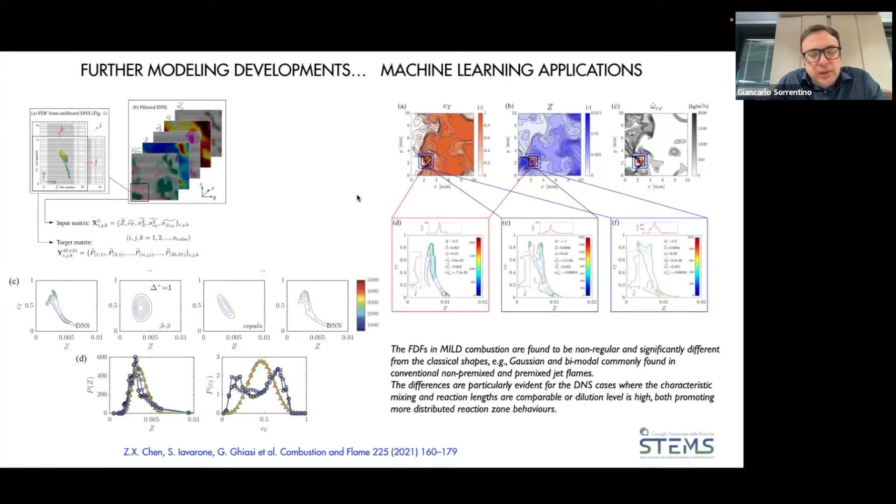Just a few words on further modeling developments in this scenario. There's a nice collaboration between ULB and Cambridge Group where they used machine learning to understand the filtered density function in mild combustion and to catch information on the distribution, in this case for the progress variable. These tools provide important information since, for turbulent combustion with tabulated chemistry, Gaussian and bimodal distributions are usually used, but in this case they found that this kind of distribution was not able to reproduce the results.

Another important application of machine learning to this kind of modeling approach was related to the filtered reaction rate, developed and obtained for the partially stirred reactor approach, where both premix and non-premix conditions were identified on the basis of training data from combustion DNS.

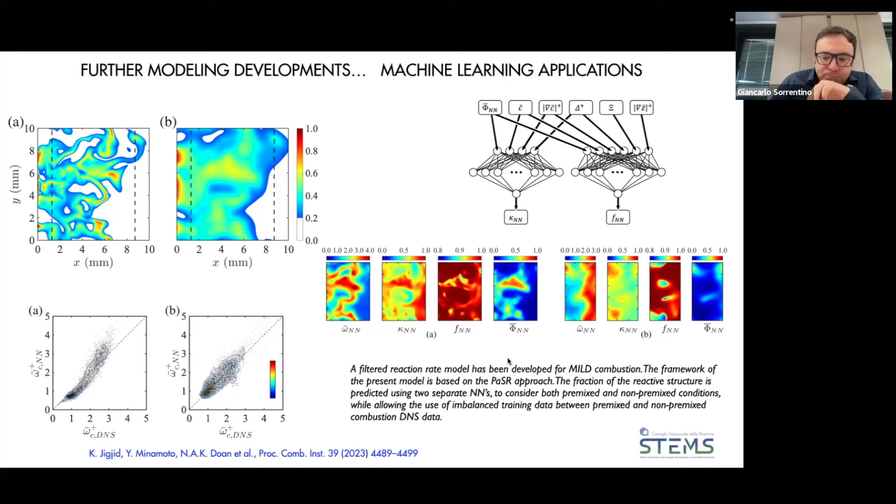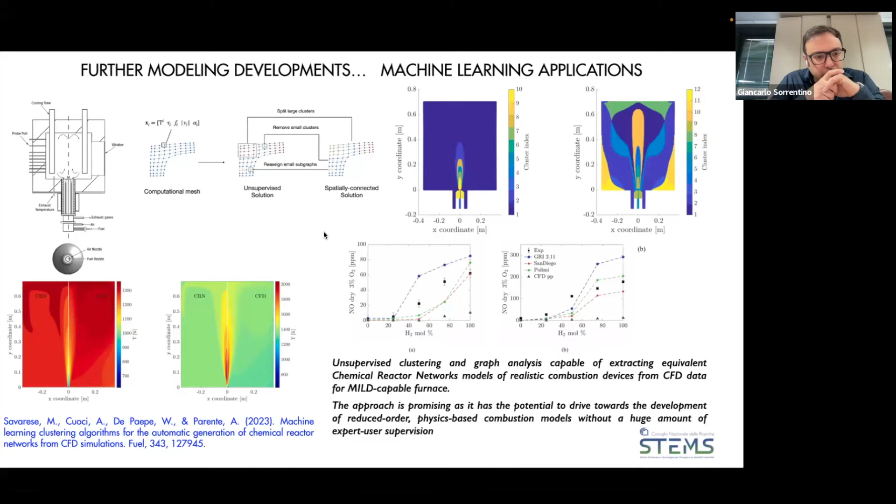Finally, there is also a work from the ULB group that is very important for the application of unsupervised clustering for chemical reactor network generation from CFD. This is, in my opinion, very important for the construction of digital twins for industrial applications.

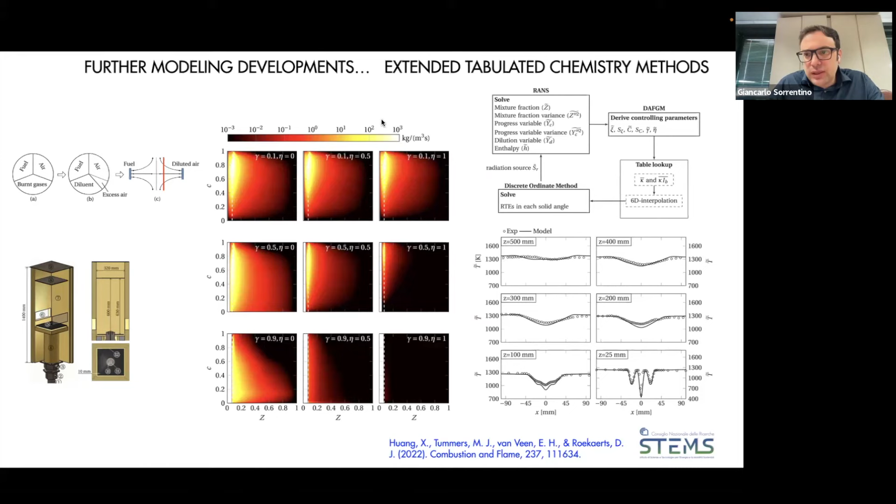Finally, based on the tabulated chemistry I mentioned before, some groups pointed out the possibility to extend this approach by introducing dilution and heat loss controlling variables with respect to the thermochemical state. This can increase the accuracy of the model, of course at a cost related to the computational time needed to obtain the lookup table.

To conclude this lecture, I want to summarize some key points that, in my opinion, are very important. Mild combustion is an important enabler for the utilization of renewable energy carriers in the framework of the energy transition. It requires a paradigm shift, especially when we want to model these systems. New reactive structures and modeling paradigms are needed for mild turbulent combustion, and we need more scale-bridging experiments to fill the gap between laboratory and semi-industrial or industrial scale systems.

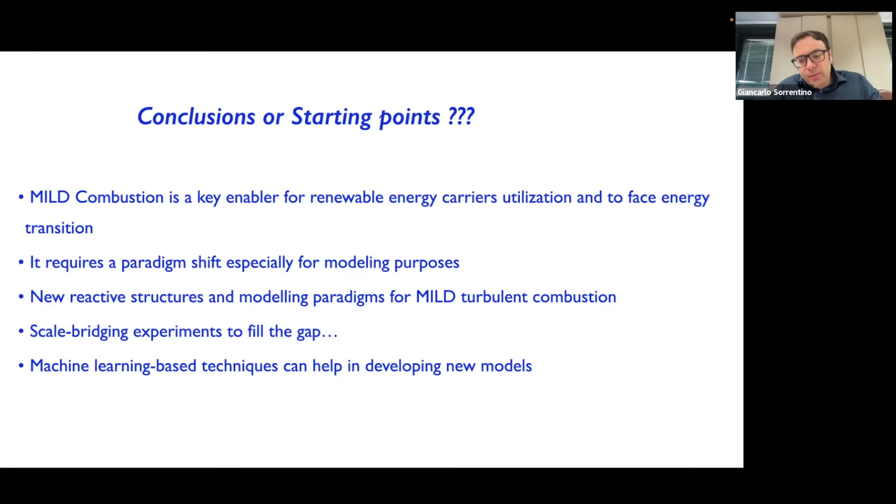Machine learning can be a very good tool to help this process in developing new models and to understand some unsolved features from the simulation.

Some bonus track: mild combustion can also be used for fuel reforming—we have a project on that—as a possibility to obtain fuels through reforming in mild conditions. There are also some applications; we have an accepted paper at the symposium on the application of plasma-assisted combustion to mild conditions with ammonia, for example.

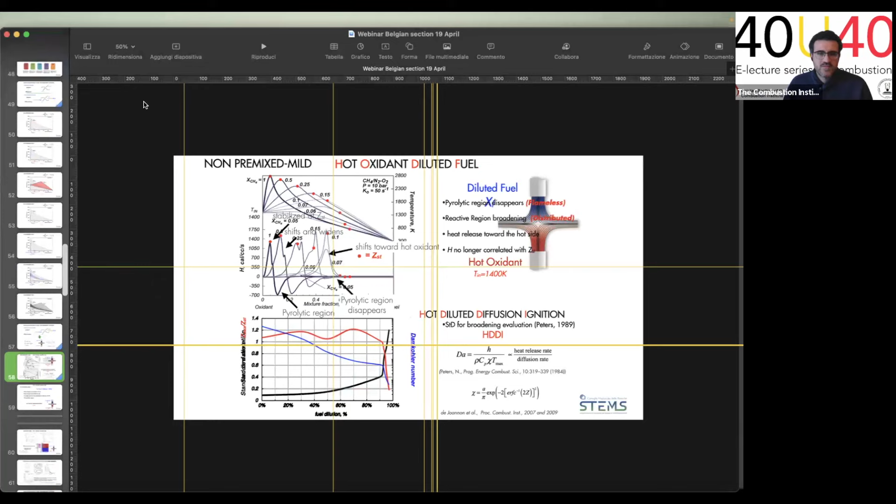I shared my screen again. When we change the dilution, I'm also moving the stoichiometric mixture fraction. So this is the main reason why we are changing the temperature peak position.

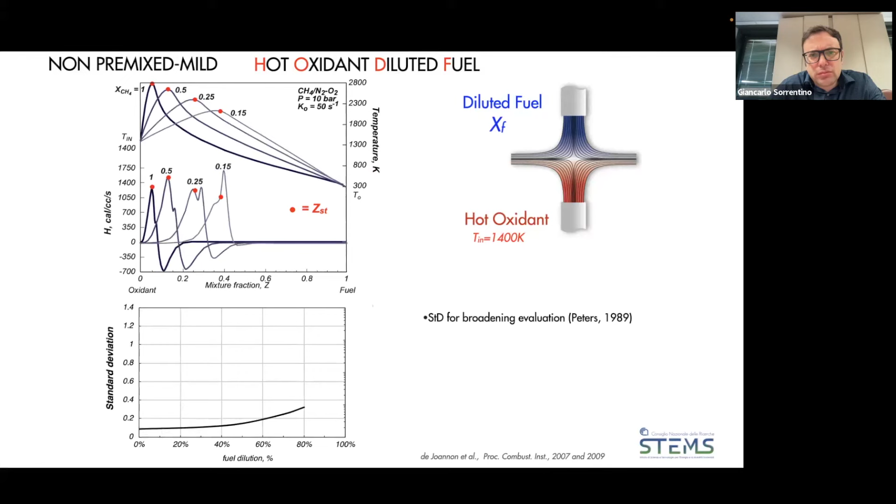Did I answer your question, Salvatore? No, not really, Giancarlo. Sorry, I wrote this beforehand and just copied it, so I didn't know what I could say - if you go a little farther, I saw that at a certain point the temperature peak goes back, shifting to the left compared to the stoichiometric mixture fraction. So I was basically wondering, why would you have a temperature peak away from a stoichiometric condition?

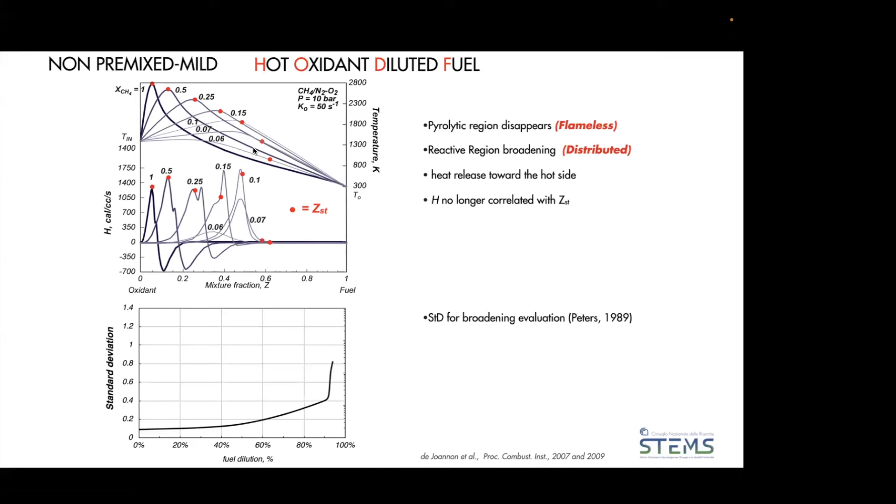This is a peculiar characteristic of this diffusion ignition process. You can recognize that this process is happening when you see that temperature and heat release are moving in the opposite direction with respect to the stoichiometric point. This happens mainly because your reactive structure is no longer related to the heat release by the flame.

So it's related no more to the stoichiometric mixture fraction, but is dependent on the heat release toward the hot side. So it's related to the high temperature of the oxidizer. This is the dominant process in this case. So we have no more a process that depends on the heat release by the stoichiometric point, but the reaction process is moved toward the hot part, that is the hot oxidizer. That gives you the enthalpy to sustain the diffusion ignition process.

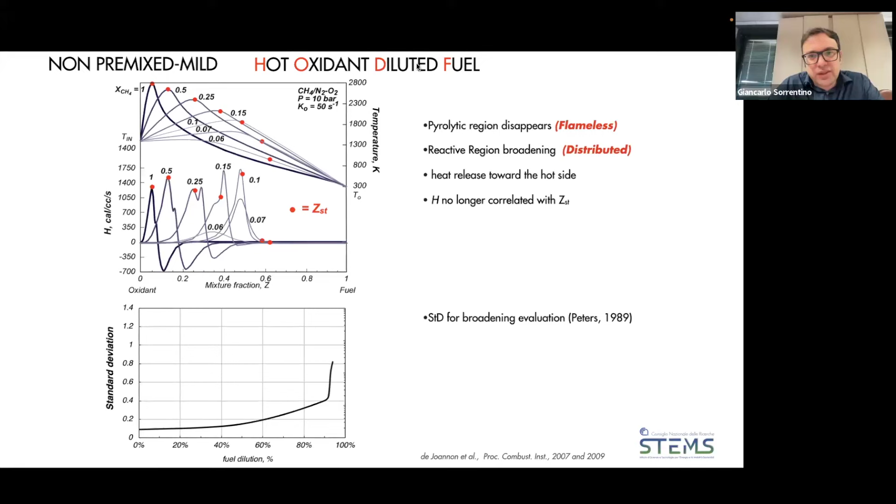I don't know if I was clear. No, definitely, yeah, it does make sense to me. Thanks a lot. Oh, thank you. Thank you. Are there any more questions for Giancarlo?

If not, I have one question. I guess all these peculiar features of mild combustion - you showed results for the fuel, which was mostly methane. I guess these peculiar features, are they fuel dependent? Will they change if we use hydrogen or ammonia or another type of fuel, or will they change, but not so much?

This is a very good question, Salvatore. Thank you.

I'm not sure with that, but we found very similar features for ignition diffusion processes also with ammonia and hydrogen. Of course, what changes is not the reactive structures, but the boundary conditions. For example, the mole fraction at which the process starts. So if we have ammonia, you can reach mild combustion for less diluted, this kind of ignition diffusion process, for less diluted conditions. If you have hydrogen, it's more difficult. We found that it's more difficult to stabilize in this ignition diffusion process. So you need more dilution, for example, to obtain the same behavior. So yes, the structure of the process does not change. What is changing is the condition at which you obtain the behavior.